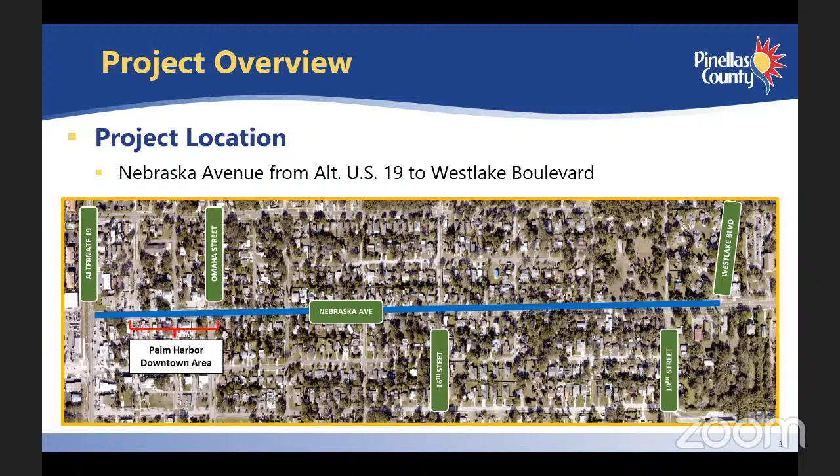So how did this project get started?

Over the years, Pinellas County has received a lot of complaints about drainage problems on Nebraska. Most of the road does not have storm pipes or ditches to capture rain runoff, so water fills the edge of the road and some of the sidewalks and runs onto private property.

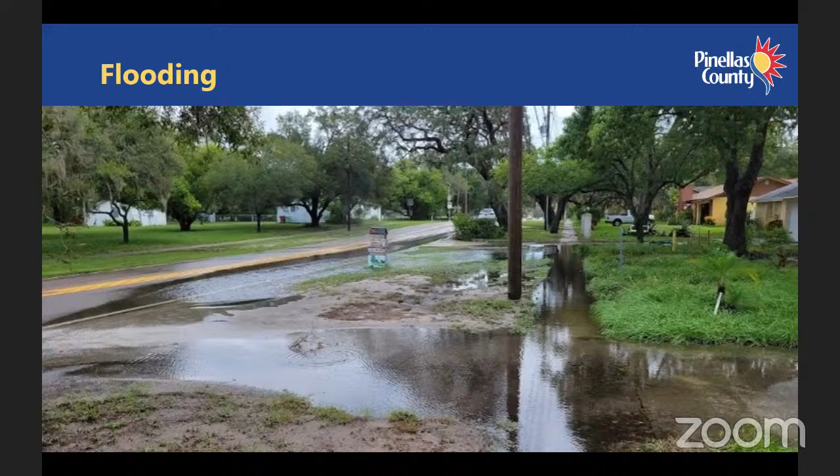We've also received complaints about the gaps in sidewalk. A lot of the north side of the street has no sidewalk.

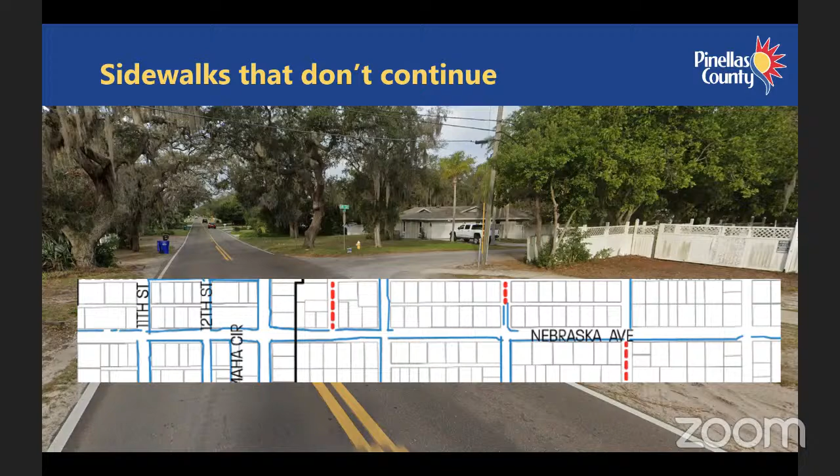Residents have also complained about concerns regarding speeding vehicles and pedestrian safety. The county's consultant examined the crash history along the roadway.

Between 2015 and 2019, there were a total of 75 reported crashes. 10 of those crashes resulted in injuries. 81% of the crashes were a combination of rear end and angle crashes. 61% of the crashes occurred in or at intersections, and 36% occurred at unsignalized intersections.

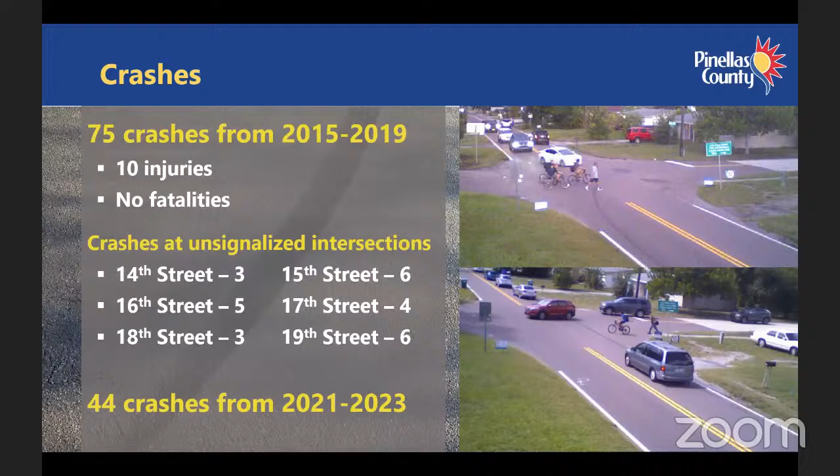Additional crash data was obtained between 2021 and 2023. During that period, there were a total of 44 crashes. 59% of those crashes were a combination of rear end and angle crashes. 34% occurred at or near an intersection, and 25% occurred at unsignalized intersections.

And finally, we have received complaints about speeding. The county installed speed radar signs a few years ago to try and slow down drivers. But even after that, data from those devices shows that 15% of cars are traveling more than 6 miles per hour over the speed limit. 15% represents more than 1,100 vehicles per day.

Because of these concerns, in 2021, the Pinellas County Capital Improvements Division completed a project development study to identify ways to address safety, traffic flow, pedestrian facilities, and stormwater collection and conveyance systems along Nebraska Avenue from alternate 19 to Westlake Boulevard.

As part of the study, the county's consultant reviewed planning documents that mentioned Nebraska Avenue. The Advantage Pinellas Active Transportation Plan, developed by Forward Pinellas, identified a multi-use path along Nebraska Avenue to connect neighborhoods along and off of Nebraska Avenue with the Pinellas Trail.

The Downtown Palm Harbor Master Plan, which was the culmination of desired improvements identified by citizens and county planners, identified Nebraska Avenue as the area's primary east-west connection between alternate US 19 and US 19. That plan noted the need for redesign of Nebraska Avenue to include on-street parking and pedestrian improvements.

So based on all of this, in 2022, the county began the design phase for improvements to Nebraska Avenue. In February of 2023, the county presented these potential improvements at the first public information meeting.

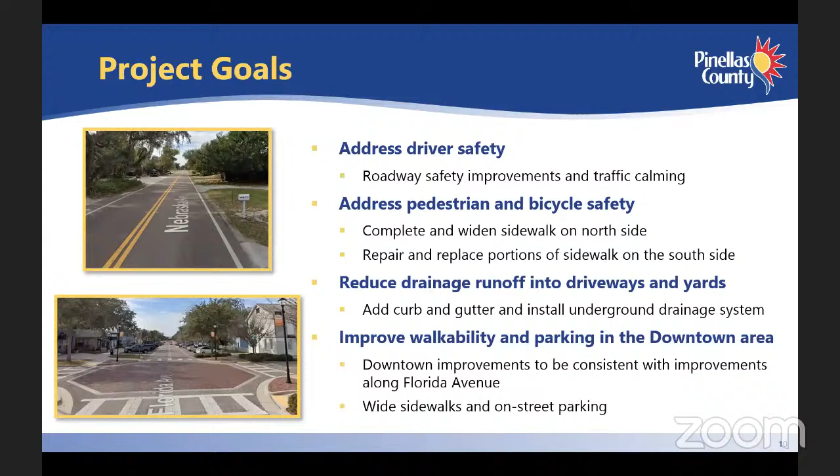Based on the study and plans mentioned previously, project goals were developed to address driver, pedestrian, and bicycle safety, reduce drainage runoff onto private property, and improve the downtown area consistent with previous improvements along Florida Avenue.

The county received a significant amount of input from the public after the first meeting, and we heard you. Save the trees, don't put in a 10-foot trail, and you expressed concern about the mini roundabout. We also heard support for more sidewalks, a desire to improve drainage, and an interest in making the road safer.

So now let's take a look at the major changes to the design. Adding the 10-foot trail on the north side of Nebraska Avenue and improving drainage was going to require taking out a lot of trees. During and after the first public meeting, citizens made it clear they did not want trees along Nebraska Avenue removed.

The county and its consultant further examined the trees to determine their critical root zone. This information was transferred to the plans to then determine ways to limit the impact to trees. The proposed trail has been changed to a sidewalk and relocated and narrowed in areas to eliminate the need to remove many trees.

One method of reducing the impact to trees is the creation of a stone filter around the root system. This stone filter area has been termed a rock burrito and allows the tree roots to remain and grow through the stone filter. These roots do not have to be cut in order to install the various improvements.

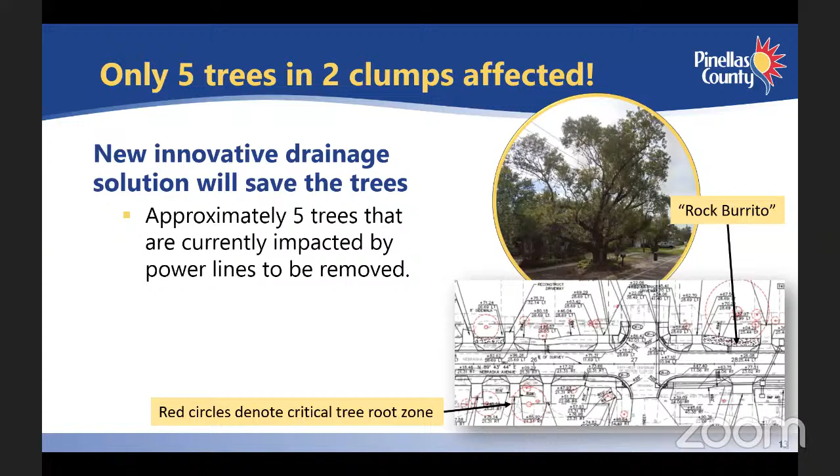The result is that we can save all but 5 trees, and 4 of those are growing in one clump near 16th and Nebraska. The affected trees are under existing power lines and will likely require additional trimming in the future.

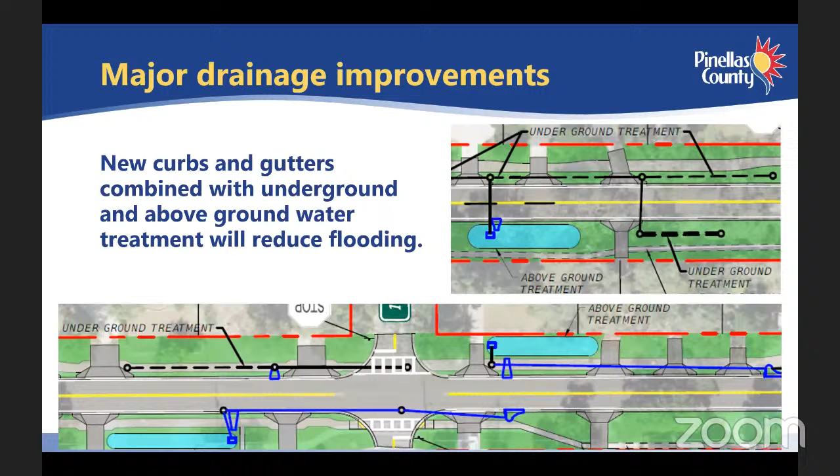The drainage improvement plans are now drafted. They combine underground and above ground solutions to collect and remove rainwater.

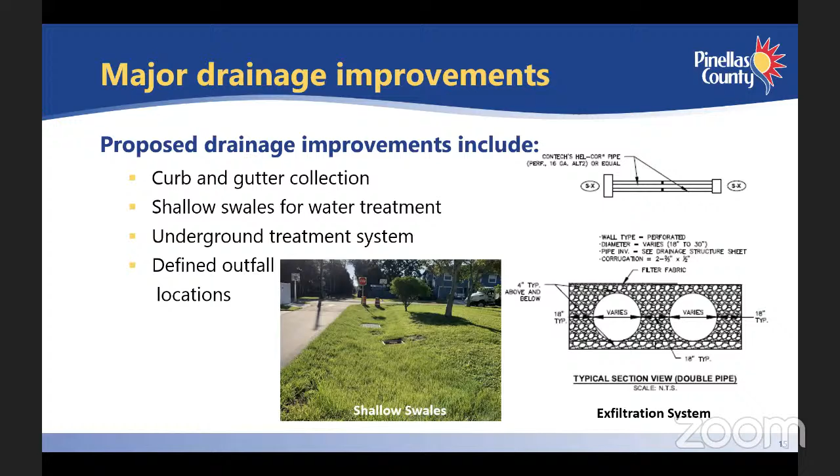The improvements will include concrete curbs and gutters, drainage inlets, and shallow drainage swales that will capture runoff from the roadway and carry it away from Nebraska Avenue. Stormwater modeling is being performed as part of this project to make sure water is carried to appropriate outfall locations. The consultant has included an exfiltration system as part of the drainage design. This system includes perforated pipe that allows water to flow through the holes in the pipe and filter through the stone fabric before it seeps into the ground. This particular design makes sure we have the necessary drainage capacity and also provides for water quality treatment.

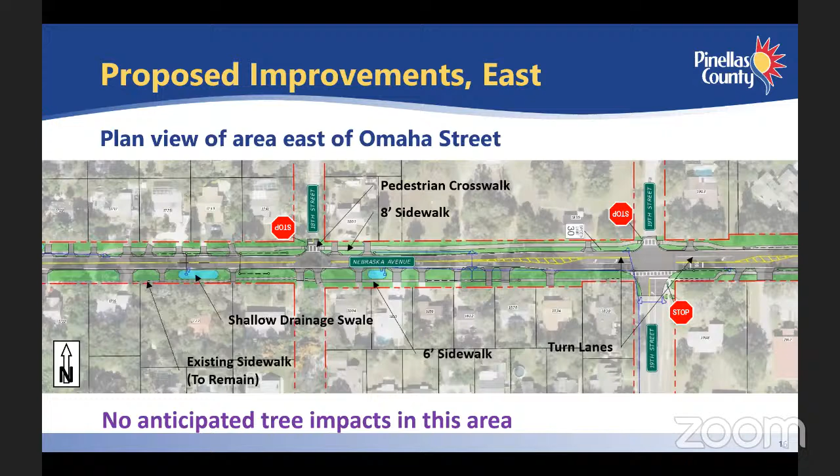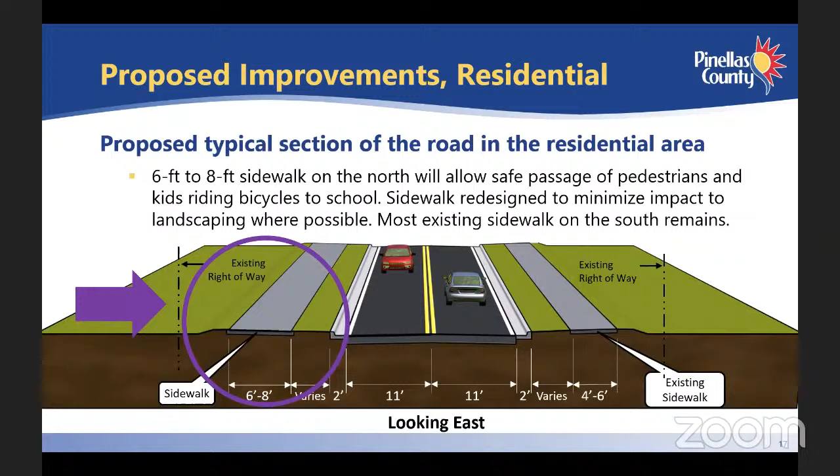The illustration shows the typical design for the road and sidewalk in the residential area. There are 2 11-foot travel lanes, and a sidewalk on the north side that varies from 6 to 8 feet to avoid trees. This sidewalk is narrower than the trail shown in the first plan, but is wide enough to be safe for kids riding their bikes to school along with people walking. The existing sidewalk on the south side remains, and concrete curb and gutter will be added along the entire section of the road.

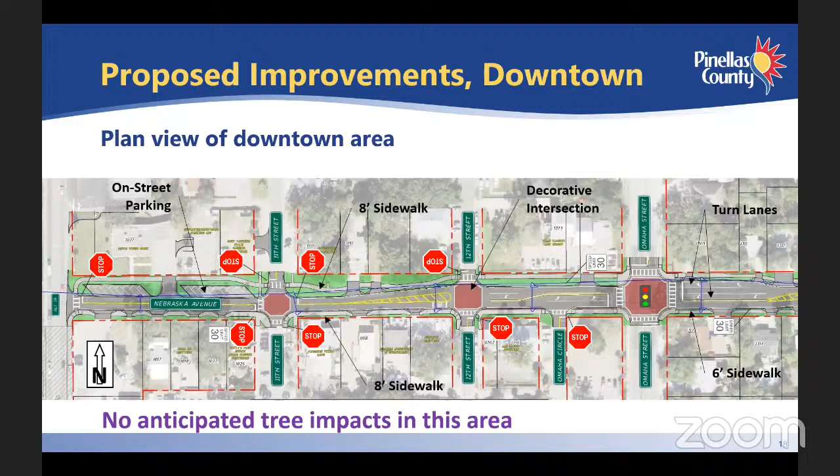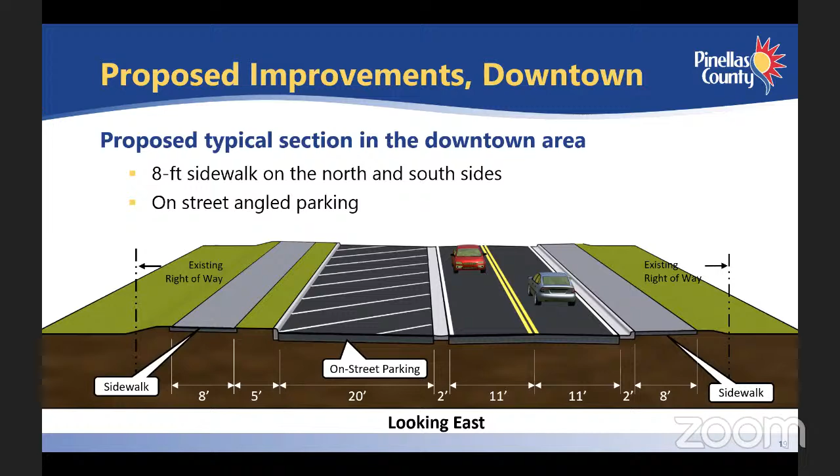This is a plan view of Nebraska Avenue in the downtown area. This view shows proposed improvements of a 2-lane roadway with decorative intersections, sidewalk on both sides of the roadway, on-street parking, and a 4-way stop condition at 11th Street. The proposed typical section for the downtown area consists of 2 11-foot travel lanes, 8-foot sidewalks on both sides of the roadway, concrete curb and gutter, and on-street parking on the north side of Nebraska Avenue between alternate US 19 and 11th Street.

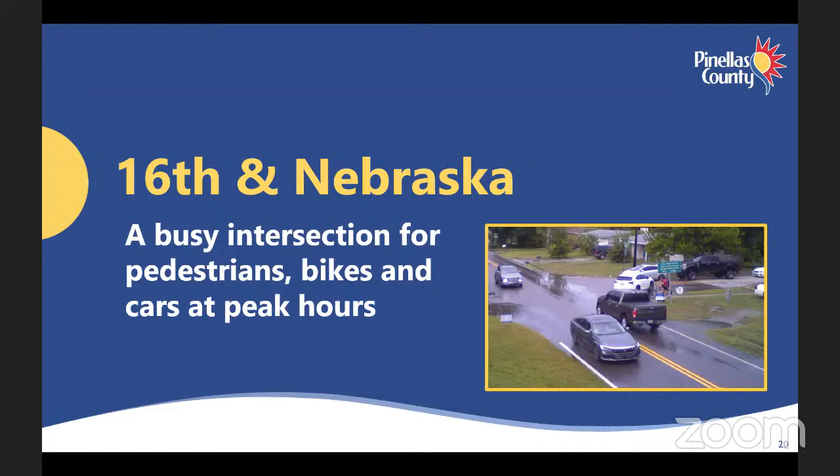16th Street and Nebraska Avenue is in the center of the project area. It's a unique intersection in this project because of its traffic. Cars, pedestrians, and bikes all meet here. So we spent a lot of time focusing on this intersection.

The county's Transportation Division performed a study of pedestrian and vehicular activity at 16th Street. This intersection is heavily used for access to the Palm Harbor University High School student drop-off area. 16th Street also serves the Palm Harbor YMCA and the Palm Harbor Activity Center, and the transportation team collected pedestrian crossing data at 16th Street in September and October of 2022. The data was collected from 7 to 10:30 a.m. and from 1:30 to 6:30 p.m. for 4 weekdays. During those hours, an average of 28 pedestrians were seen crossing Nebraska Avenue daily.

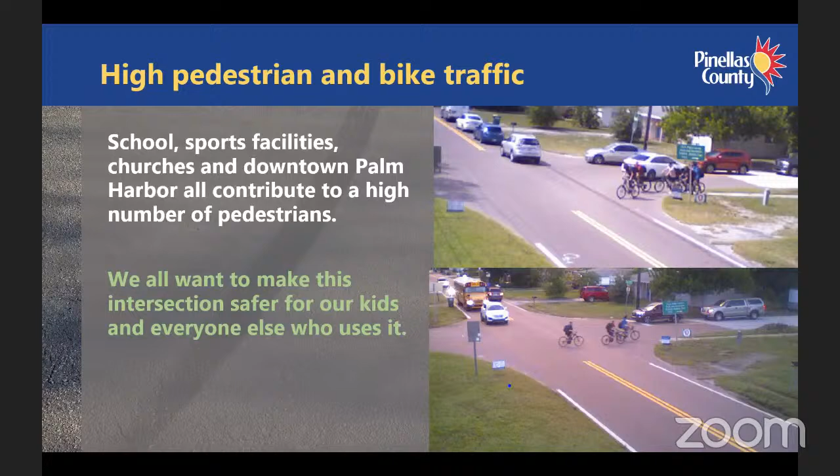As a result, a pedestrian crosswalk and rectangular rapid flashing beacon, also known as an RRFB, were added in October of this year. Photos of this intersection taken by the county's Transportation Division show a considerable amount of pedestrian and bicycle traffic crossing Nebraska Avenue. This intersection really does need safety improvements.

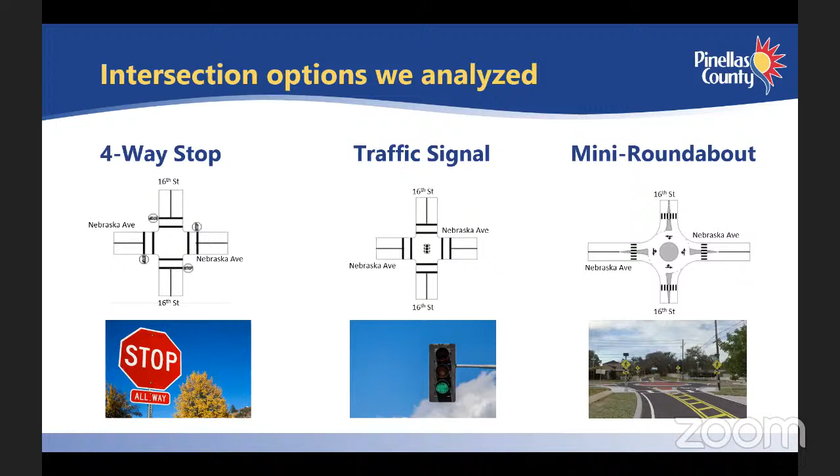Right now, this intersection is a two-way stop. On 16th Street, the cars have to have a stop sign. Cars on Nebraska do not. This is the least amount of traffic control you can have at an intersection. The next three types of intersections that provide more traffic control are a four-way stop, traffic signal, and a mini roundabout. Each of these type improvements were considered for this intersection.

At first, a four-way stop seems like an easy solution. The pros are that pedestrians would have the right-of-way for all 4 crossings. This also is a fairly low-cost solution. However, there are downsides to the four-way stop. It has the lowest throughput of any of the options, so it would cause additional backups on Nebraska Avenue during peak hours. You could expect lengthy delays.

Because of the lower throughput, it would require widening Nebraska Avenue to add left turn lanes for cars turning onto 16th Street. The widening would have an impact on several properties, and the stop sign would affect several homes that could experience blocked driveways due to the number of vehicles stopped at the intersection during peak traffic times. Remember our crash statistics? 81% of the crashes on this street have been a combination of rear end and angle crashes. The addition of a stop sign at this location could cause an increase in that statistic.

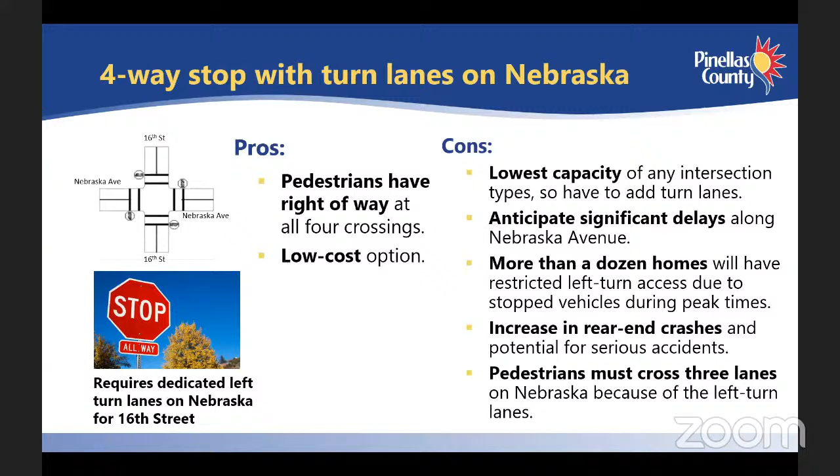Finally, because of the turn lanes, pedestrians would have a wider street to cross than they do now. And this also adds to the potential delay at the intersection.

The next type of intersection considered was a traffic signal. There are requirements that must be met before a traffic signal can be installed. A study has not been done to determine whether a signal could be installed, but let's assume that it could.

The pros of installing a traffic signal are the addition of a left turn lane arrow for 16th Street, people understand how they work, and pedestrians would be able to cross when the traffic light is red.

So what are the downsides? We all hate waiting for traffic lights. Anytime a car triggers a light on 16th Street, it would stop traffic on Nebraska. Just like the four-way stop, this would require adding turn lanes on Nebraska to keep traffic moving, which would create the same impacts on properties as the four-way stop intersection.

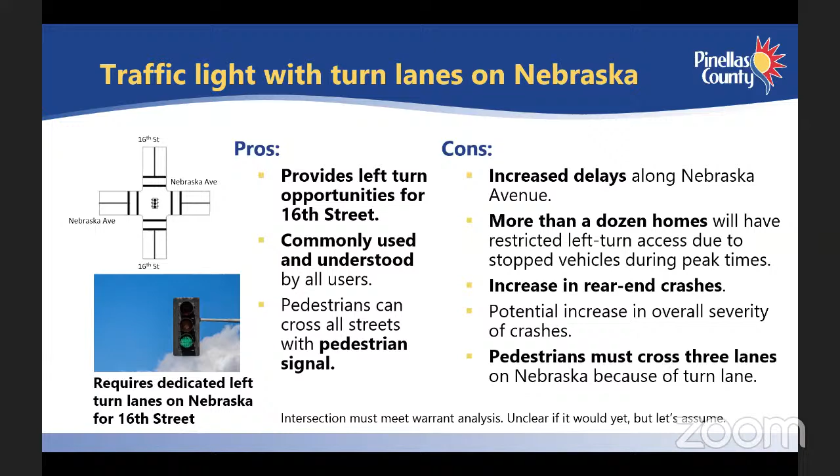Just like the four-way stop, traffic signals tend to increase rear-end crashes. And also, like the four-way stop, pedestrians end up having to cross a wider street with 3 lanes because of the new turn lanes.

The mini roundabout was the next option considered. At first, we didn't think it would fit. The Federal Highway Administration and the Florida Department of Transportation have done extensive research on all types of intersections, and they have minimum design requirements for them.

Because of the residential nature of the street, it turns out that the mini roundabout does fit and would meet the strict federal and state requirements. Because the other options require adding lanes, it turns out that we could use the mini roundabout in roughly the same amount of space required by the other options.

So we started looking at this more seriously. We know some people have said they don't want it, but let's explain the mini roundabout option in more detail. It may be different from what you were thinking.

The pros are: reduces speeding, reduces crash severity, pedestrians can safely cross all streets at one lane at a time with flashing beacons. Crosswalks are set back from the intersection to reduce what drivers must pay attention to at once.

There is continuous flow, it provides a left turn solution for 16th Street, and it's less expensive to maintain. The downsides are it may require a period of adjustment for drivers, and splitter islands will restrict left turn access to 4 homes.

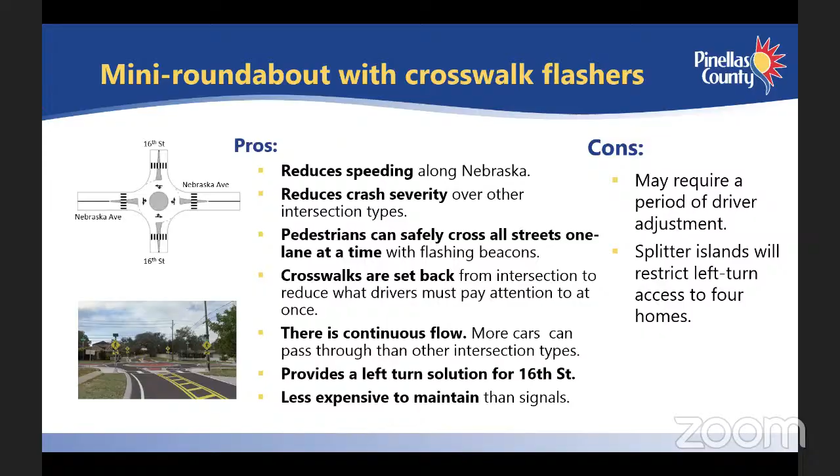This is a concept drawing. It's not complete, but gives you an idea of how it might look. This is a mini roundabout. There are several of these in the county already, and they have worked well where they've been constructed.

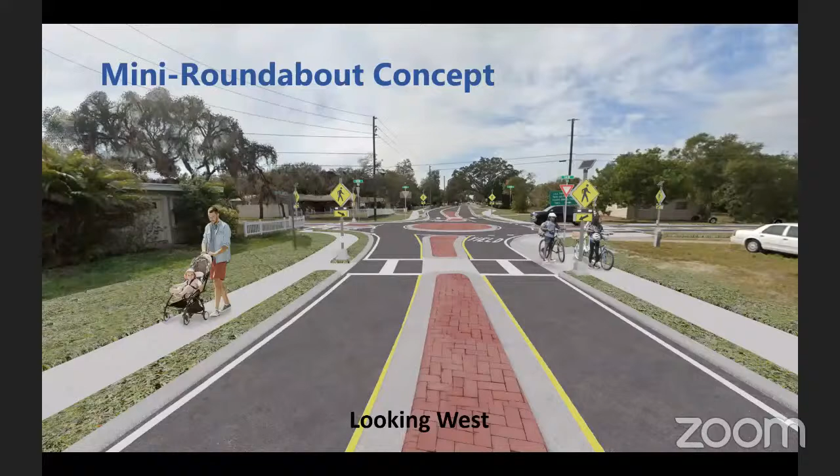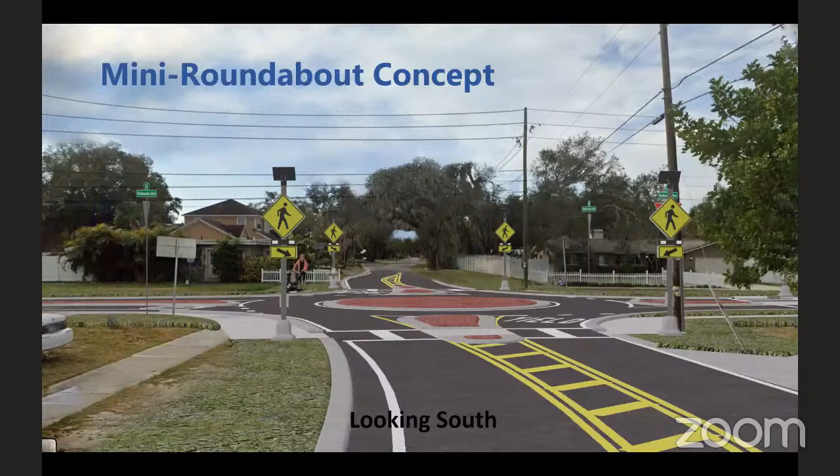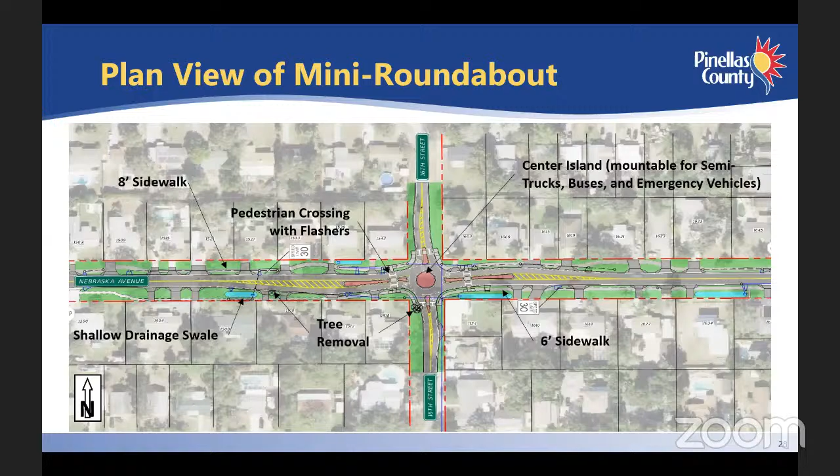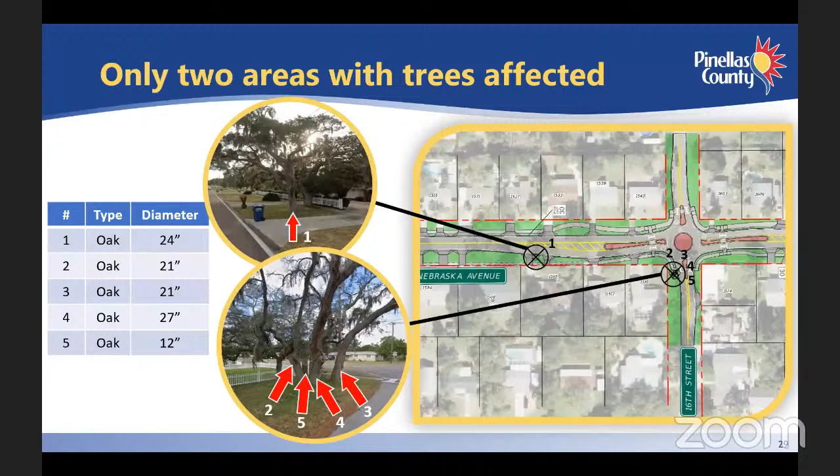As indicated earlier, there are 2 locations where trees would have to be removed. One location is a cluster of 4 right at the intersection, and there's 1 tree 3 houses to the west. Each of these trees have been trimmed due to the power lines and may require additional trimming in the future.

Here's a closer view. So after studying this, we felt we had to recommend the mini roundabout. It keeps traffic moving and reduces the potential for future crashes.

Let's look a little more closely at the design and how it works. Drivers naturally slow as they approach it because the lanes divide and curve slightly. They come to crosswalks before and after they go through the intersection instead of when they're in the intersection. So they pay more attention to pedestrians at the time when they actually encounter them.

Cars yield to vehicles already in the roundabout. If no one is in the roundabout, they don't have to stop. They can slowly enter and go through or around the circle, keeping traffic flowing throughout and without having to turn lanes.

Once you're in the roundabout, you have the right of way and can exit at any point. A left turn becomes an easy swing around the roundabout, which is much safer.

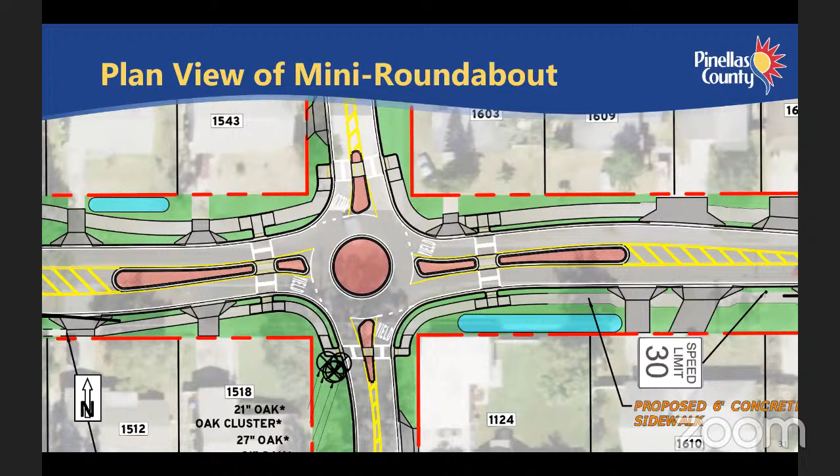Remember the crash data from this road. People run into each other from the back and the side. That's much less likely with this type of intersection. Study after study has proven that roundabouts reduce the number of accidents.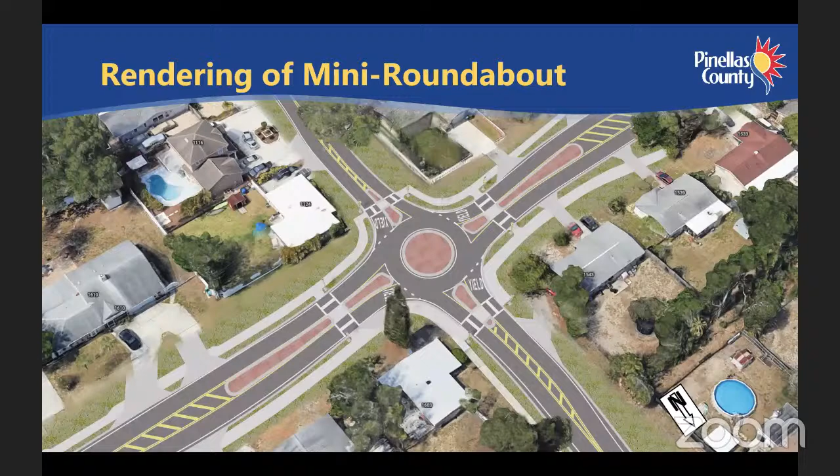There is an abundance of information regarding roundabouts on the Federal Highway Administration's website at highways.dot.gov — enter roundabout in the search bar. Even TV's Mythbusters did a study on roundabouts and proved that they're more efficient than 4-way stops.

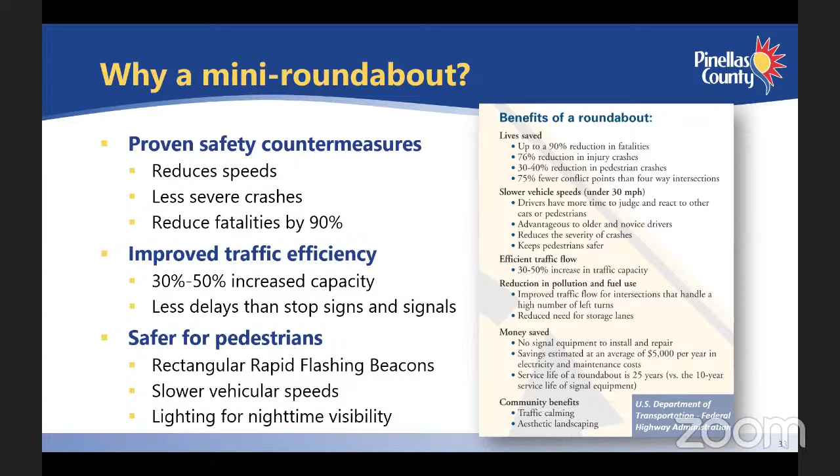We have made a lot of changes to this project since the first draft. The smaller sidewalks, the innovative drainage solutions, and ways to save the trees have made this latest design a much better solution than the first draft. We very much appreciate everyone's input and ideas. Our responsibility is to propose the best solution based on the project goals and well-researched options. At the intersection of Nebraska and 16th Street, we have no doubt that the mini roundabout is the safest solution.

We've heard that some members of the community oppose the roundabout, and we hope that giving you more information tonight has helped you take a new look at the challenges this intersection presents and the reasons we are recommending the mini roundabout.

We appreciate everyone hanging on with us tonight. This was a lot of information to cover, but we thought it was important to be as transparent as possible. To recap, we've explained how we plan to save the trees. We showed the reduced size of the sidewalk and drainage improvements. We shared the plans for the east, downtown, and central sections of the project. And finally, we explained the intersection options for 16th Street and Nebraska Avenue, and why, in this case, the mini roundabout is our recommendation.

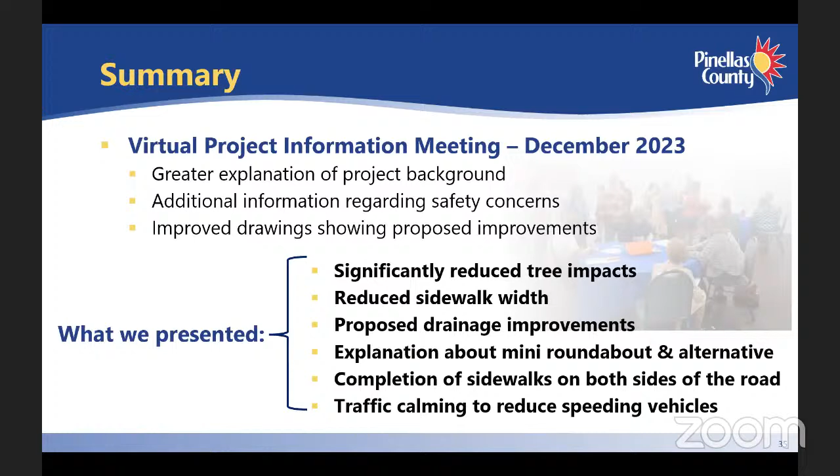So what's next? The project design is about 60% complete at this point. When this webinar ends, you'll see a link to the survey. We'll also post that on the project webpage at pinellas.gov/Nebraska Avenue. We'll review the feedback you provide and complete the design this spring. We expect to begin construction in late 2024 and finish in early 2026.